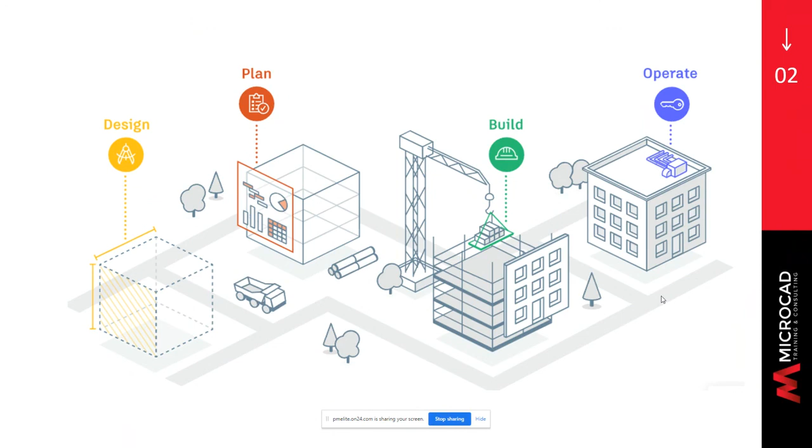First, let's talk about the problems that the Autodesk Collaborative Design tools are intended to address. This applies to both vertical and horizontal construction endeavors: architectural, civil, plant engineering. Projects are becoming more complicated, data is getting heavier, and the number of participants is increasing. These partners could be located anywhere but have to share information.

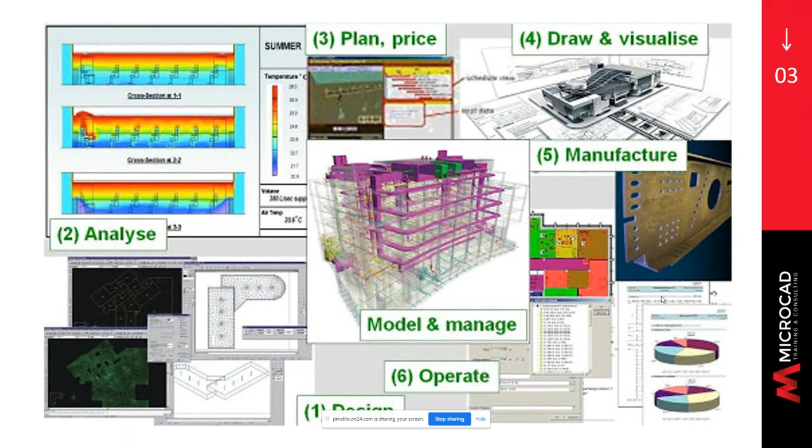Using a BIM model as a central data repository makes sense in this environment, but how do all these players get access to the data? From experience, we know that solutions like Dropbox are error-prone, FTP sites consume IT resources, VPNs are unpredictable, and SharePoint-like approaches don't provide the integration with the design tools that we need. Connectivity is no longer a 9-to-5 thing. People are working 24/7 from their home, their car, the trailer.

We need better. Autodesk saw the solution as being cloud-based and tied to the software that you use in everyday work. Autodesk Construction Cloud provides access anywhere with any device, freeing up the workers to get out of the office and onto the site.

It provides collaboration tools to enable designers to create submission sets for review and monitor the progress of the review. All of the project data from the BIM model can be reviewed in 3D or as a 2D drawing set. This data could be architectural, MEP, structural, civil, whatever. It's all in one location.

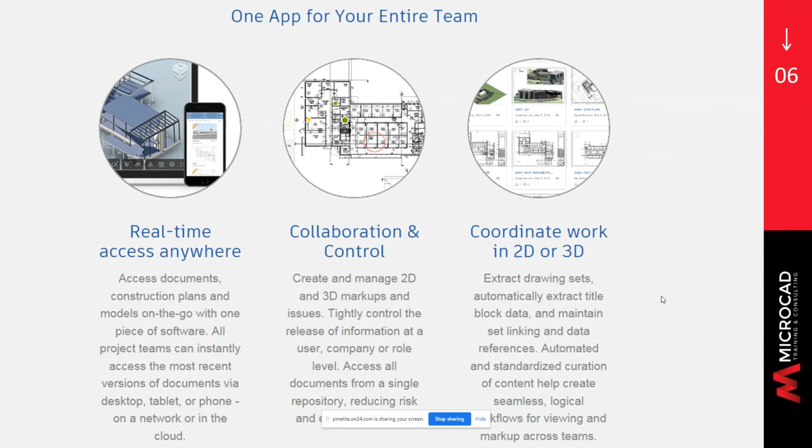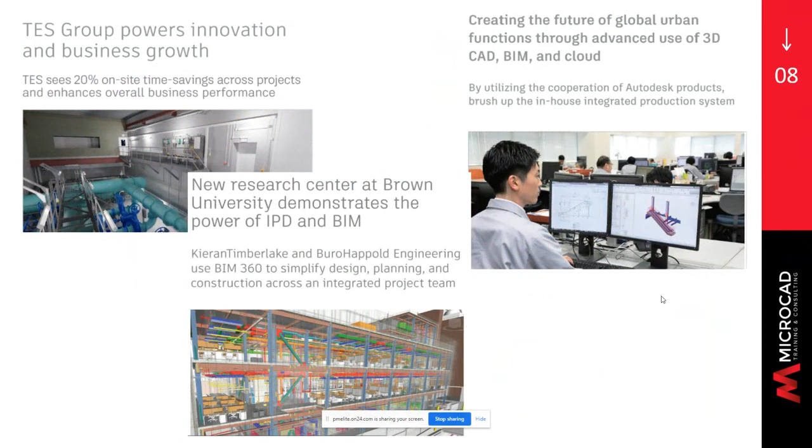And this isn't a vision of the future. Real companies are building real structures today using Autodesk Construction Cloud. Whether it's the world's tallest modular structure, complex highway and bridge projects, or commercial construction, all have benefited from Autodesk Cloud services. Today, I'm going to be talking about using 3D data with Autodesk BIM Collaborate Pro.

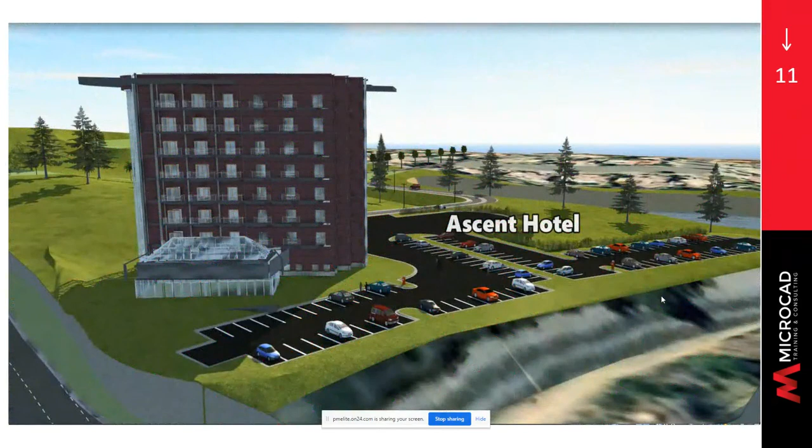But Autodesk also has an integration with Civil 3D. This allows infrastructure designers to share their work in the cloud, perform markups, and participate in the review process. And AutoCAD users aren't ignored — the Autodesk Desktop Connector allows other applications like AutoCAD to work in the cloud and share references.

So let's talk about a collaborative project and how they work with teams. Usually a team would consist of people working on a discipline, but it isn't limited to that. Here we have created 3 teams, one each for architecture, structural, and MEP, but we could have other teams for survey, civil, environmental, or others.

As we create the teams, we can assign individuals. Data from each of these teams is grouped in a folder and permissions set so that each team can only edit data in their folder.

For Revit, cloud work sharing allows multiple users on the team to simultaneously work on a single central file, design, and then sync to central. This concept is nothing new for Revit users. What's new is keeping the central file in the cloud.

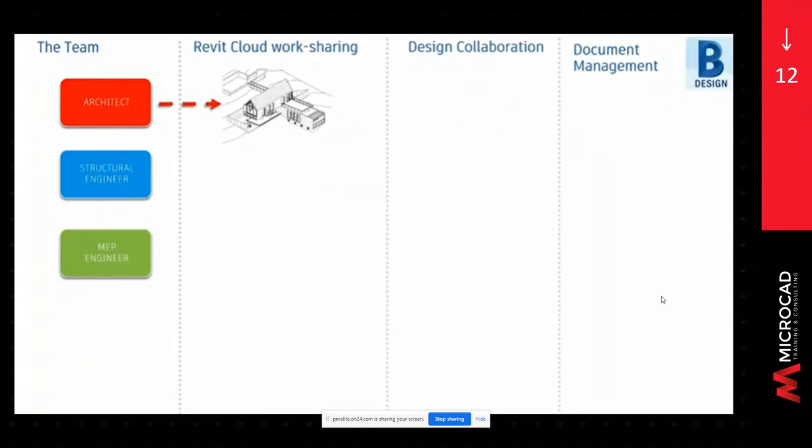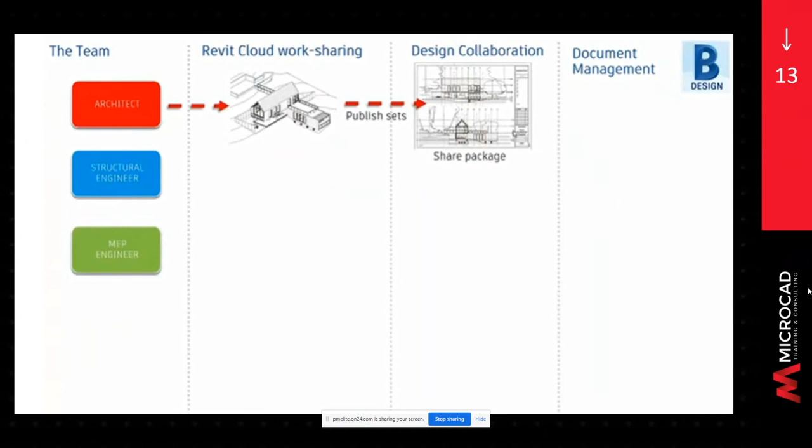When the architectural team wants to share the model with others on the project, they would publish sets of models, views, and sheets. These are put in a shared folder available to everyone on the project. Each discipline could then explore the shared data and okay it for use with their models, which moves it to their consumed folder. Then each discipline continues their work.

Just like the architect, each discipline using Revit can work share within its own team with its own central files. Teams using Civil 3D can access the data references and X-references created by others on the team. Other data provided by the other team members, like architectural models or building footprints, can be brought into the Civil 3D model. Civil 3D surface data can be published for use by other teams.

So there is a bi-directional sharing of data, both coming into the civil data and taking civil data out to others. While actually working on a DWG file in Civil 3D, the file is locked to prevent others from using it.

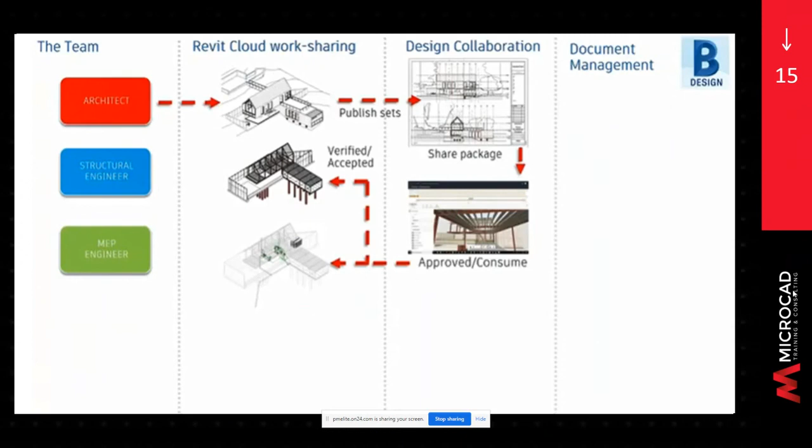Sometimes Civil 3D users may want to prevent others from using other files and/or shortcuts, so Autodesk provides a manual lock-unlock capability if you want to ensure that no one is changing a particular file.

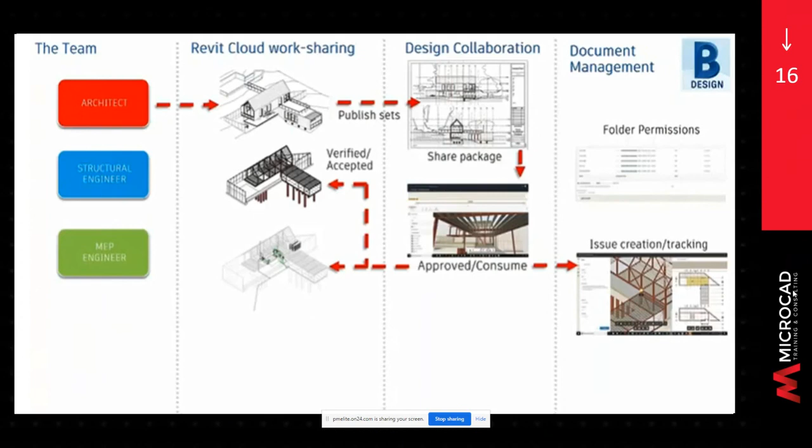While all of this is going on, members can communicate by creating issues for resolution and being involved in review processes. Partners in the project don't have to have an authoring tool like Revit or Civil 3D to participate in the collaboration. Anyone can create an issue, and the issue can be assigned to someone with an expected completion date.

These issues can be managed, reviewed, and maintained in the document management module of BIM Collaboration Pro. A summary of outstanding issues also shows on the project homepage. Issues create an audit trail, which can be reviewed at the end of the project.

Anyone with the right privilege can initiate a review process for sets of documents. People assigned to the review can mark up the documents, review and approve or reject, and the whole process is managed so people can see what reviews are in process and which are assigned to them. The review process is configurable, so you define what steps are required for the review.

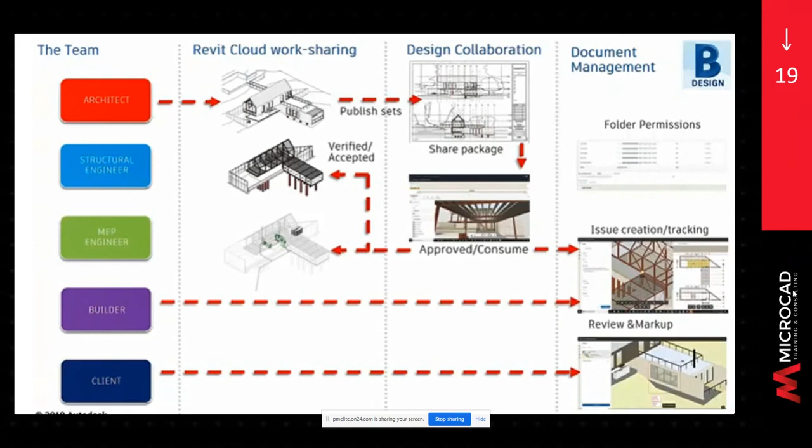These collaboration tools — Revit work sharing, Civil 3D data sharing, release packages, consuming packages, issues, and reviews — can be configured in different ways and with different permissions to meet the particular needs you have on that project. Let's see how these things would look in a live project using Civil 3D, Revit, and BIM Collaboration Pro.

Let me move my screen down. Here we go.

So in live Autodesk BIM Collaborate Pro, what we have is data sets set up within the cloud. So now all of the companies who are using BIM Collaboration Pro have what's called a hub, or a central location in the cloud that stores all of their data.

Within these hubs, you could have any number of Autodesk Cloud projects. Typically, these would also match to real-world projects, and these projects represent the work that you're doing. So you're organizing your data by that particular project.

Within any of the projects, you can set up your own folder structure. Typically, as I mentioned before, the folder structure would follow the disciplines. So you have a folder for architectural, a folder for civil, a folder for mechanical, a folder for electrical, fire protection, and so on.

So for each of these folders, you have the ability to set permissions. So on the electrical folder, you would want to assign permission access only for the electrical engineers and the people who work for your electrical consultant. By providing that permissions, you're ensuring that people are able to do the work they need to, but can't step on the toes of anyone else in another discipline.

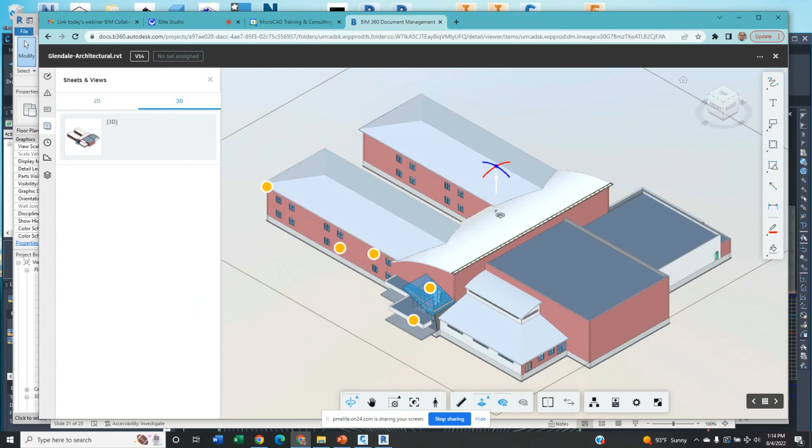Within the architectural area, maybe we have an architectural model. This happens to be a Revit model. People can look at the model and review it. You have the ability, if this is a new model to you, to slice and dice it so you can see what's going on inside. That's useful when you're evaluating a model you haven't worked with before, so you can see what's going on at different locations within the building.

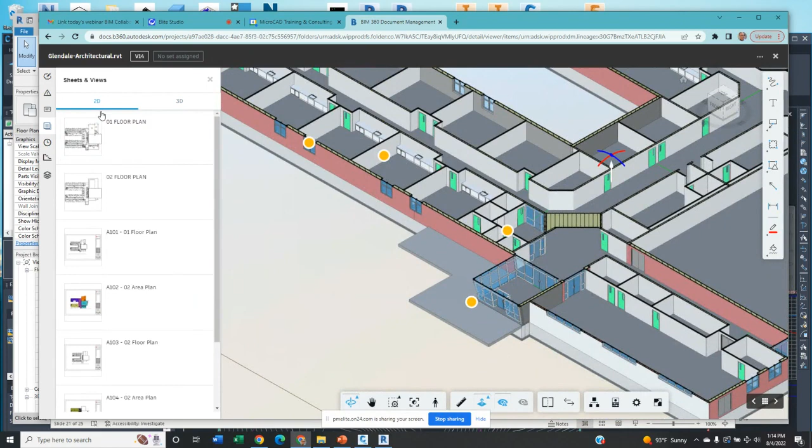As well as the 3D model, you also have the 2D drawings that represent that model. And as typical in 2D drawings, you have the ability to mark these up. There's a markup panel for creating red lines and establishing comments that you add to that particular drawing. These comments can be either private, kept within your own team, or public, making them visible to everyone on the project.

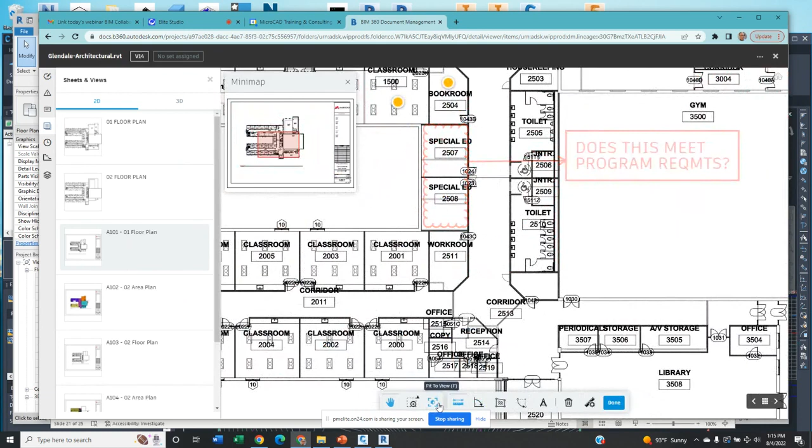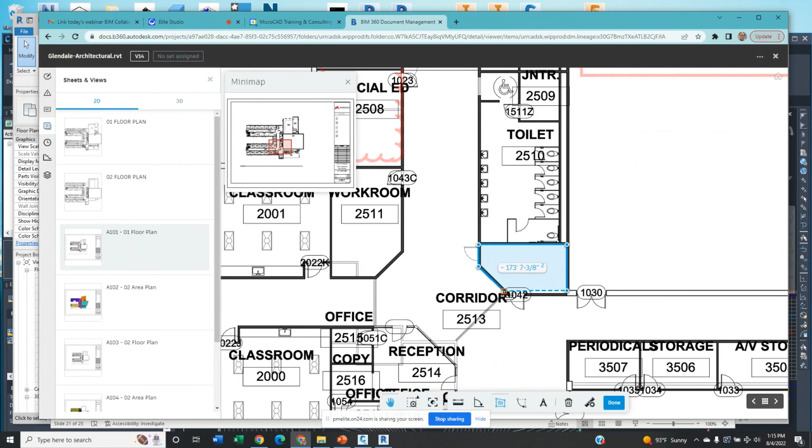Within the model, we can also have measuring tools. Remember, this is available to people who may not have Revit, may not even have AutoCAD. If they wanted to measure on the model, they might want to see how wide that corridor is, 15, 9 1/4. Or maybe they want to measure how big a particular room is. So we see it's 173 square feet. So you have the ability to work with these models and get information from them, whether you have Revit, Civil 3D, AutoCAD, or not, just working directly in the cloud-based tools.

By the way, if this drawing came to you not as a Revit model but rather as a PDF, you still have the ability to measure the model. You just have to register the scale of the drawing first.

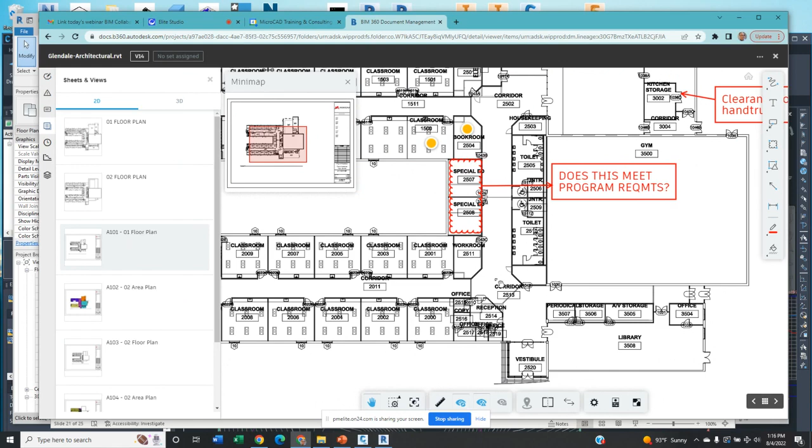Something else you could use for collaboration are issues. Those are these yellow dots. If I click on one of these yellow dots, this issue is that there's a storage room with no door. So if we look at that, yeah, that might be a problem. Anyone can create an issue, assign it to an object in the model, and provide information like 'we need access here,' then assign it to a particular person. This one was assigned to Douglas with a due date.

Now, this is a sample project, just a test project we play with. You see the due date was back in November, so Douglas hasn't done his job - but that's just because it's a test project. By assigning the due date, we can manage the issues for the overall project and be aware of which issues are overdue and which need attention.

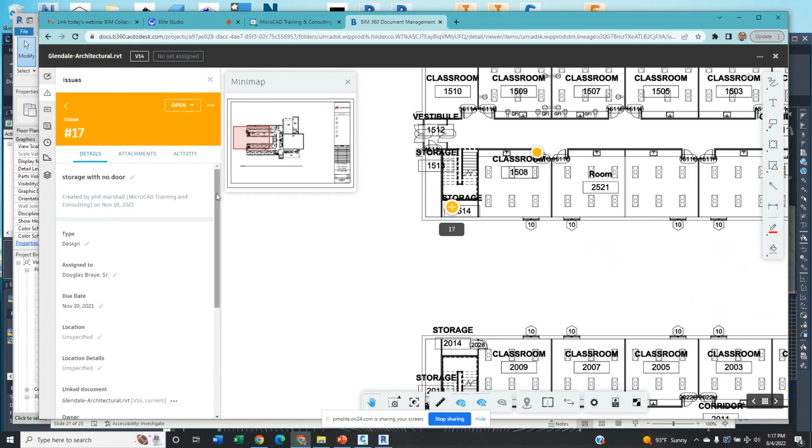It wouldn't be unusual to have dozens, or even a hundred issues on a production project. So you can filter the issues you see to only the active issues, or only the issues assigned to me, or only the issues that relate to civil data. You can set up your filters for issues in lots of different ways.

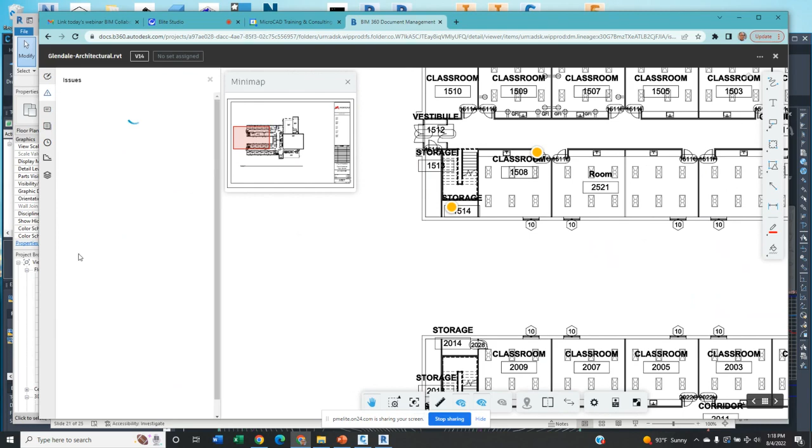Here we see the other open issues for this project. And if we click on one of the others, like gap of window opening, it jumps to a view so you can see that particular issue. That's this one. So those views are automatically related to the issue, and now we can look at that issue in the view where it was created.

We talked before about creating reviews. So when someone has gone through this model and established the comments and concerns they have about that particular model, they could submit it for review. Submit for review lets you establish different review processes and push that document or set of documents through. You might have an internal review that only goes to one or two people, and then a project leader review that goes through your boss, the project leader, and maybe a project coordinator. So you can have different review cycles depending on the people you want involved, whether it's multiple people for the same step or just one person as a gatekeeper.

So we could create a review process for these documents and then look to see what reviews are in process right now. It shows who initiated the review and who's next to act, and it varies for different people. The reviews then need to be done by that person to complete it.

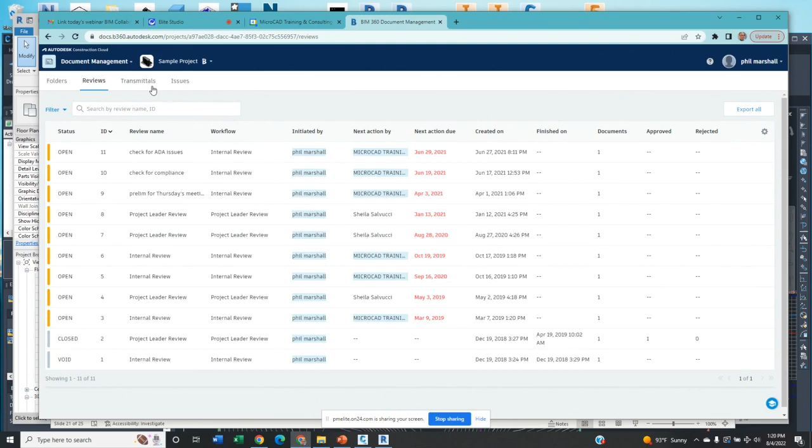We also have the ability to handle transmittals. You could take any set of documents, whether it's just a single document or an entire published set, and create a transmittal cover sheet. It remembers and provides an audit trail, so you can go back and see all of the transmittal packages that were released, who it was sent to, and whether they opened it or not, when they opened it. So you can set up these transmittal packages and provide documentation after the fact that, yes, I did send that package on this date.

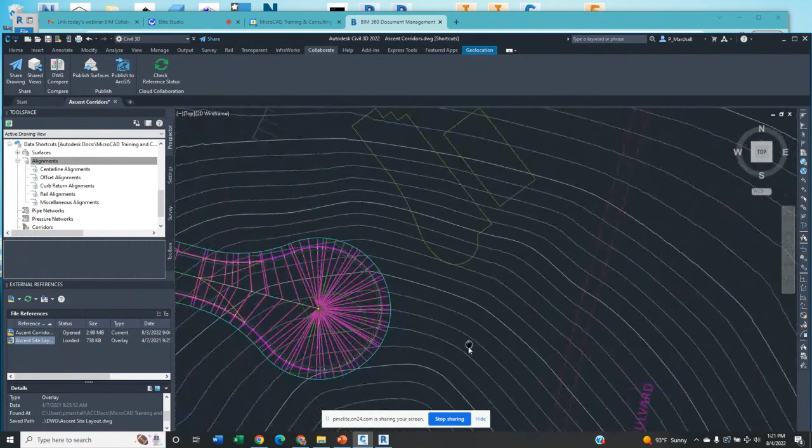All right, let's go in and look at what Civil 3D looks like when it's working in the cloud. This is a project that was set up to provide some road work and some grading for a hotel project. Up here in yellow is the footprint of the buildings that they need to grade around.

Fairly straightforward project. The footprint would have been provided by the architectural designer from a Revit model, so this would be tied to the Revit model. But using Civil 3D with data on the cloud is almost the same as using it with on-premises data. When we're talking about the working folder, setting up shortcuts, all the file references, this is the same concept. The only difference is that you're using cloud addresses and locations rather than on-premises locations. And the way Autodesk makes it all come together is the Autodesk Desktop Connector, which maps those cloud locations to folders on the user's C drive.

So you're identifying the cloud location, and Autodesk can map those to your own local machine.

On this particular model, we've got a site layout file that was a reference file. If we look at the actual path, I don't know if you can see it with the small lettering, but that is basically a cloud address, a cloud location preceded with a location on the C drive. So what it's saying is that this is a cloud location, but we're temporarily putting it on your C drive so you have fast response. But it does know that it came from a cloud location, which is important.

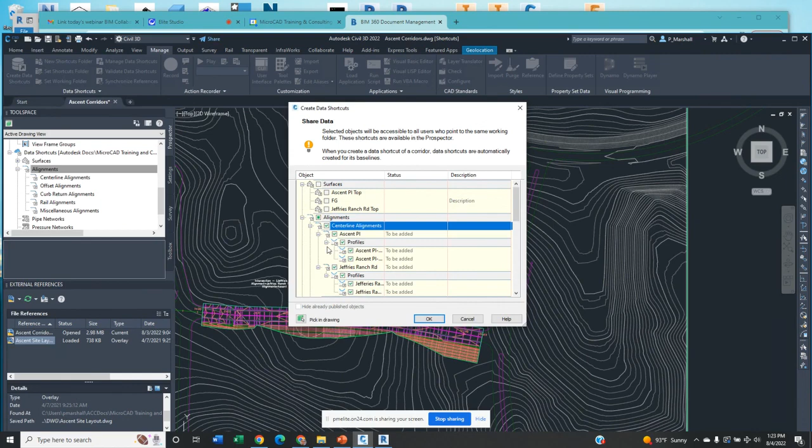So if we're going to create shortcuts, let's use the centerline alignments. I think there's two of them. Yeah, so there's two centerline alignments. We're going to create data shortcuts for both of those, and then we'll look in the cloud to see where it put the links.

So here we have the centerline alignments, Ascent Pl and Jeffries Ranch Road. These are centerline alignments, which now we have the shortcuts for.

If I take a look at my project, the cloud project name was Civil Ascent Dev. It was under project data, civil data, and there was a shortcuts folder, and under the shortcuts is of course where the shortcuts are put, and these are the links, the XML for those two, the Ascent Pl and the Jeffries Ranch Road shortcuts. So what we've done here is we've created that shortcut, but we've got it in the cloud.

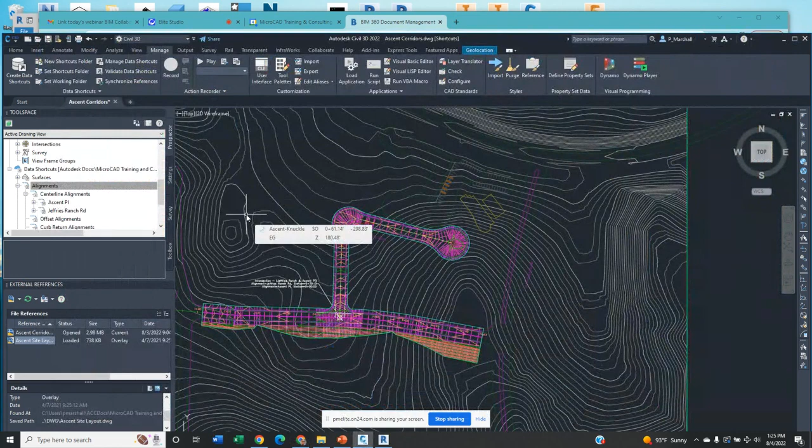So using what you know about Civil 3D right now, you can get to using it on the cloud very simply. It's very much the same things. A couple things I will point out: on the collaboration ribbon, there's a couple of tools that you're going to want to be familiar with.

One is publishing surfaces. So if you have a typical environment like this, where you have an initial surface and a grading surface, we will want to publish the grading surface so the architect can look at their building with that graded surface available to them. By publishing the surfaces, it makes it available to people in other teams on the project.

And the other thing I want to mention is the check reference status, which just ensures that you've got the most recent copy of all of the reference files that you're working with.

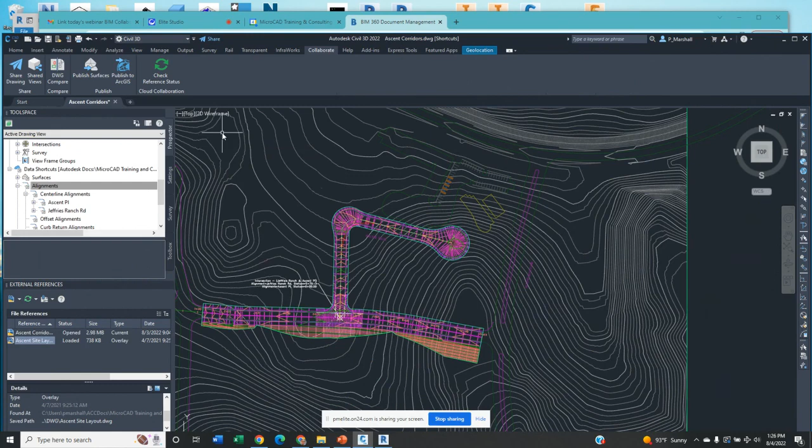Remember what I said before, that we're going to use the shared folder to put data that we want to share with other people on the project. So the architect can't map in the grading surface until the civil engineer has gone through and made a conscious decision: now I'm ready to share this surface with the architect. So they did that with these models.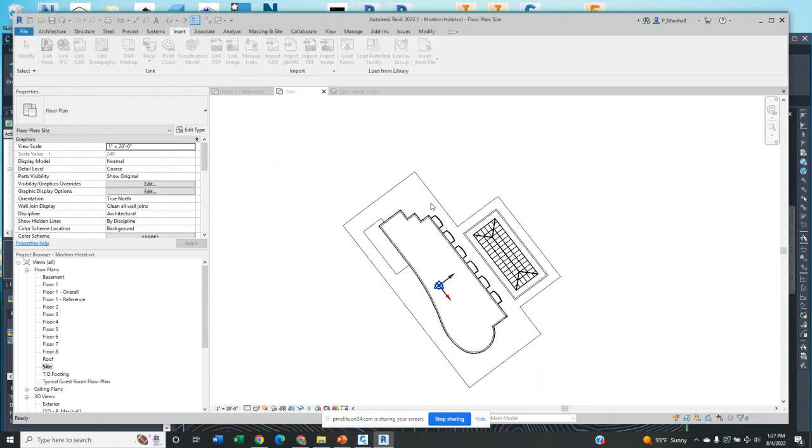So we're going to bring in the grading with the parking lot. We'll create a link. So the civil engineer is under control, all of the data is under their control. People can't go around poking around in the data. It's released to the other members of the team only when they say it's ready for use.

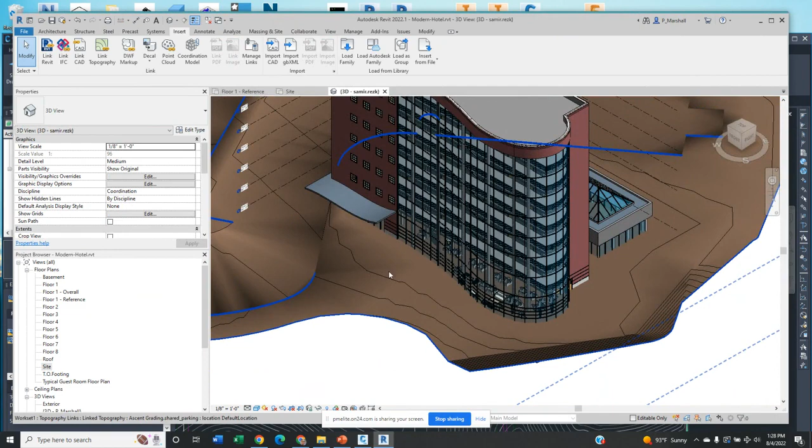So if I go to a 3D view of this, this is the grading model with the hotel sitting on top of it. So each individual discipline has control of their own data. Because of the permissions, only the people who are authorized can go into your folder and work with that data. And only your choice of when you share that data, when it's shared to the other members of other teams in the project, so it's still under complete control.

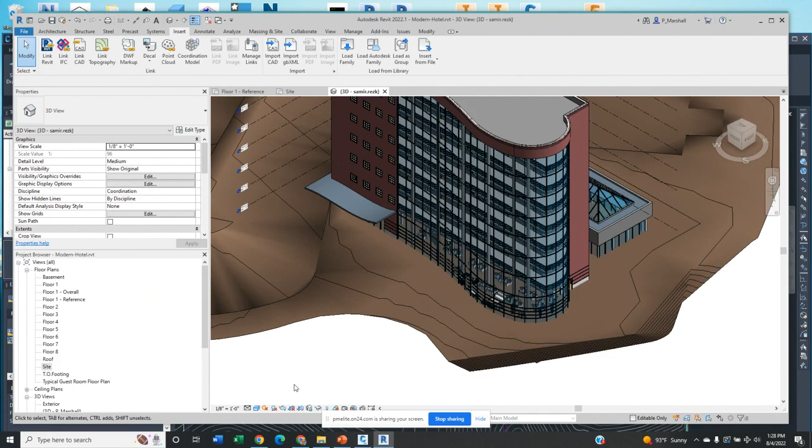All right, let's look at the cloud solution. So we talked about how this would go from the civil to the architect, and how the architect would provide the footprint, and how the civil will give back the surfaces. So what does that look like for someone who's not using Revit or not using Civil 3D?

So this might be the project manager who wants to understand what's the status of the different parts of the project. So in a sample project, we've got a design collaboration tool. And design collaboration will show the different things that people are working on. So here, for example, I'm the MEP team, and I want to show the mechanical model.

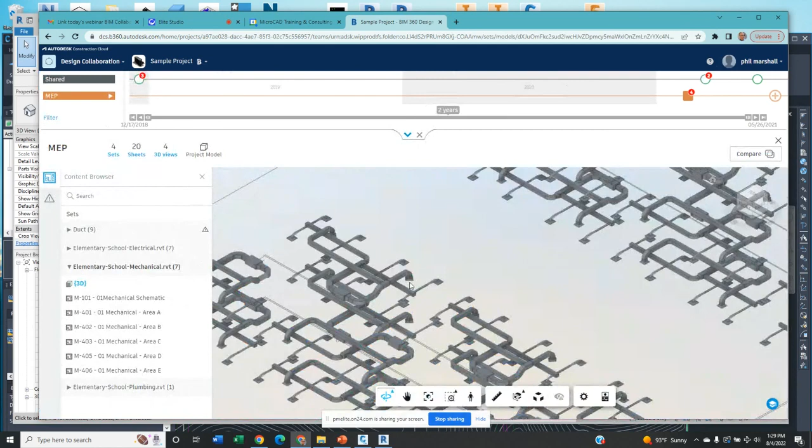So this is the mechanical model I'm working on, and that is now available to other teams if they want to use it. The architectural team, for example, could bring it into their model to examine where the vents are and make sure that the ducts aren't a problem in the wrong place.

If we look at all of the teams, you can see that some of them have, let's look at the civil team, so these are the civil models that are shared and available for other people. Some of these projects, you see, like the architecture team, have these circles. What the circles represent are release packages of data that are available for us to work with.

So if I picked on one of those packages, then I could see what the architect is doing. And of course, let's get this package, that would be the hotel. This is a different project. Let's take a look at what this package is. This is the school that we were looking at before.

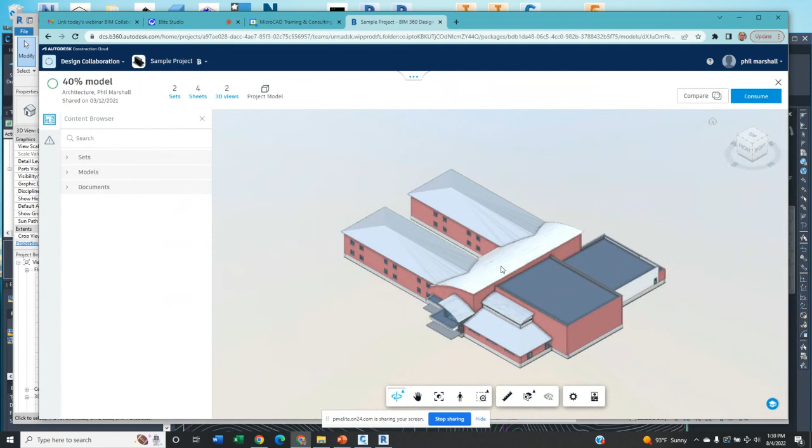So you can see, if you're the project manager, who has created what packages, when they were released, and how many people are working with them. So this is like swim lanes for each of the teams to see when they've actually published data.

One more thing I want to show is model coordination. Model coordination is a fancy way of talking about interference. And with the cloud-based solutions from Autodesk, you can check for interferences amongst any number of files. In this case, we're looking at interferences between the architectural and a MEP model.

So that's all the models I've got right here, but we could have any number of models. We could check against the civil utilities. So you've got underground pipe, and you want to compare against some structural foundations, then absolutely you can do that and find interferences.

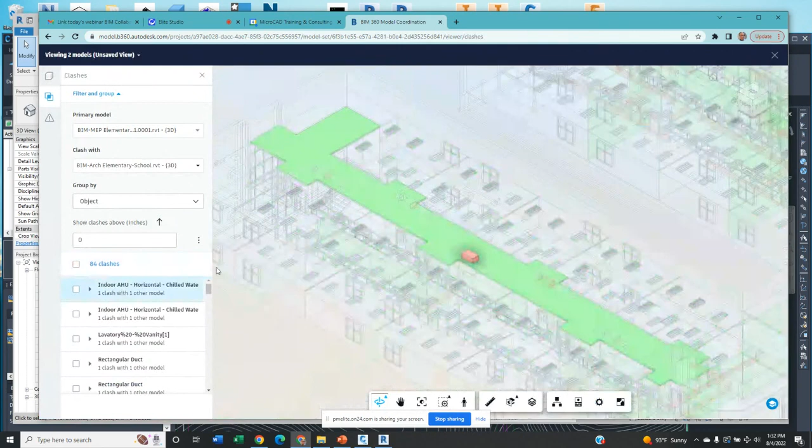Here I'm doing architectural versus mechanical. So the interferences it found, 84 of them, are indeed architectural versus mechanical. Here's an example of an air handler unit that is interfering with that ceiling.

So I could create an issue that establishes this is a problem. I can assign that issue to whoever I'm going to have fix it. I'm going to tell the architect to move the ceiling, or I'm going to tell the mechanical team to move the equipment, and that will be their job to take care of it.

But the idea is that we've got these interferences. We've established how many there are, what kind of interferences, what they interfere with, and now they can be resolved. And by the way, when we resolve these interferences, it keeps track of what interferences were created by which team, so you can establish what team is most likely to cause interferences in the future.

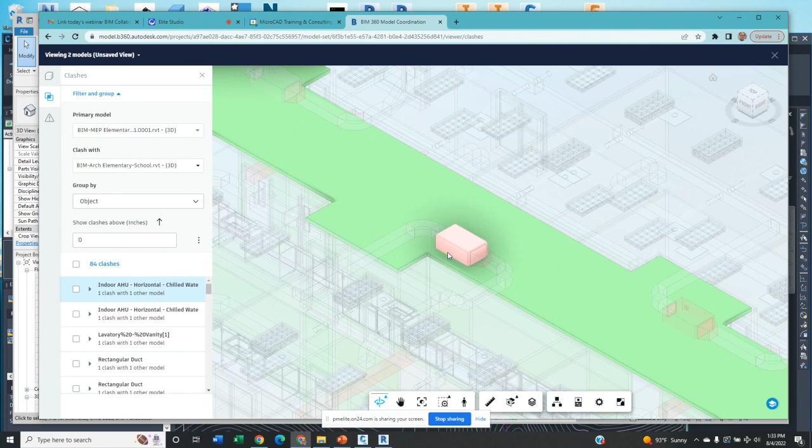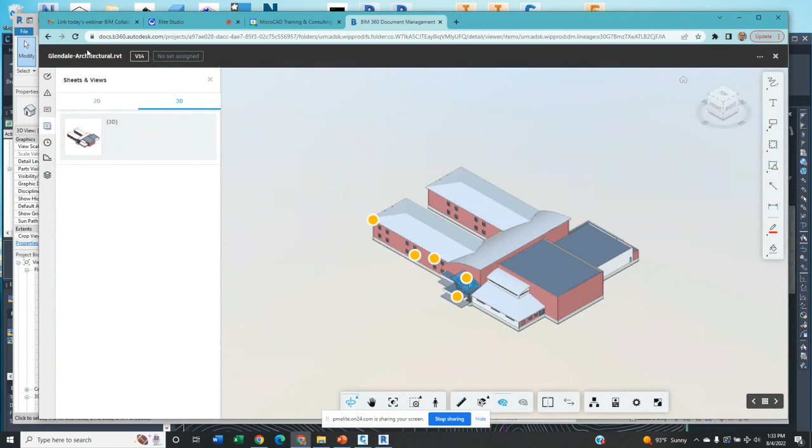All right, one more thing I want to show is this. All of this data is up on the cloud, and the Autodesk Cloud Solutions keep track of versions for you. So not only are you guaranteed to getting the most current version, but it also lets you see prior versions. So on this particular model we've looked at already, there were 14 different versions. And if I look at the history, we see all of the different 14 versions going back to 2018 for that particular model.

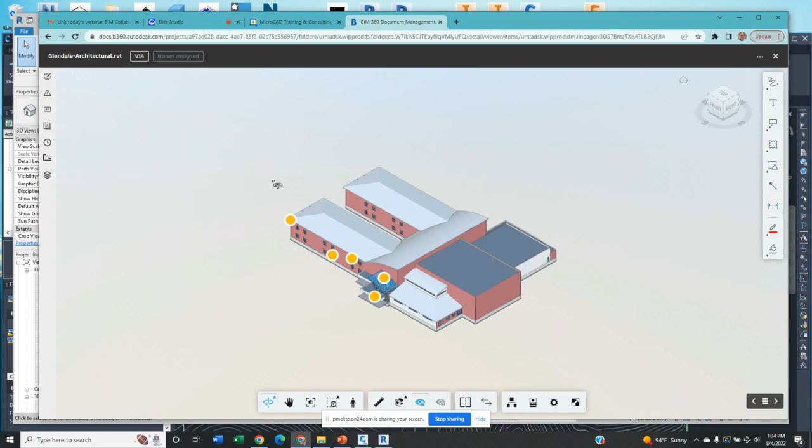So it does have the ability to go back in time. And if we get a situation where the architect does something, a change that just isn't going to work out, you can revert back to a previous version. So that's useful. But one of the things that everyone asks is, okay, this is version 14, what did you do since version 13? That's a very common kind of question. So there is a tool, the compare tool, and what it does is it shows between the two versions what things are new, what things have been removed, and what things have been changed.

So in this case, we see there was one object added. It's in green. What is it? It's a 4x4 window. So it knows not just that there's a window there, it knows what kind of window, it knows all the information about the window. Nothing was removed, there was nothing shown in red, and two objects were modified. Well, the wall was modified, obviously, to cut a hole for the window.

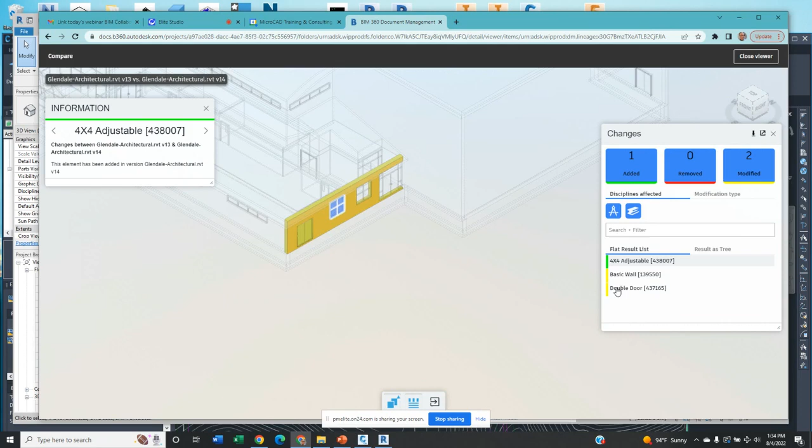The door, how was that modified? If I click on the door it tells me exactly what was done to make it modified - it was moved by 9.5 feet. So evidently the architect slid the door over to make room for another window, put the window in. So these kind of capabilities of being able to see what's new in this particular version, how is it modified from before, that's very, very powerful, very useful.

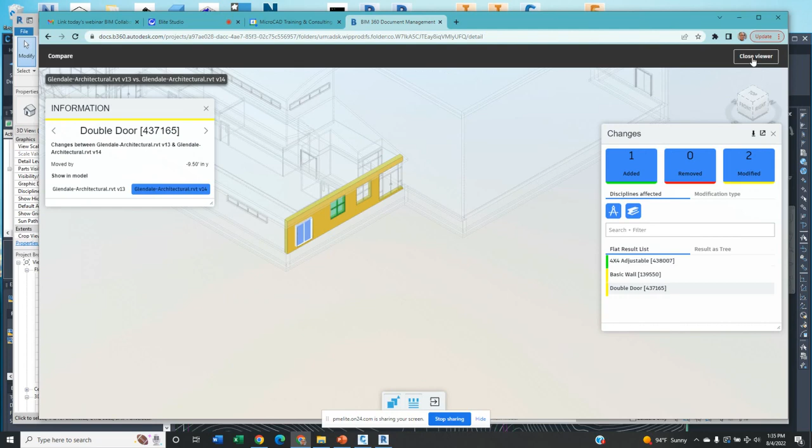All right, let me go back to here.

So what we've seen is how BIM Collaboration Pro helps the data to move and to be shared on the project, whether you're authoring it in Revit, Plant 3D, or Civil 3D. We saw how that could be shared between users in a team, and also how it could be shared with users in other teams. We saw the document management tools being able to keep track of versions and ensuring users get access to the most recent data. We showed you some markup and issue tracking, the review workflows, and transmittal registration to share the data.

We looked at design collaboration, so it showed where the different teams published their work and what status those published packages were in, and allow people to look at any of the published data. And we looked at the model coordination tool to see interferences and how to resolve those interferences by creating the issues and assigning it to people who can make the issues go away. And what Autodesk provides here is a workflow flexible enough to be configured for any situation or business model. And to ensure your success, MicroCAD provides services to help you get started with BIM Collaboration Pro, and we will support you in any phase of your project so you can reap the tangible business benefits: smooth collaboration, improved productivity, risk avoidance, and schedule certainty.